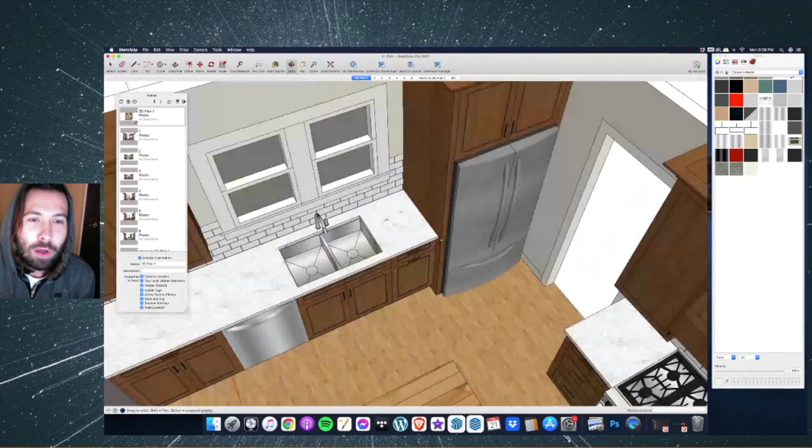I'll show you guys all my material selections and how I go about designing in Google SketchUp. What's cool is this is actually for a client of mine. I have to do two designs, and this is one of the designs here that's labeled. So what we're going to do is build the second design, and I'm going to show you step by step how I got to a point that it ends up looking like this. Then we'll even go in and I'll show you how I do all of the buttons. We'll have a lot of fun with it, and by the end of the video you guys should have learned a thing or two, and we'll show you how to do the kitchen model.

So let's get into it. I'm going to go back to the set here, and actually, why don't I just show you the model first? So this is a simple kitchen remodel here, this is the 3D plan. Again, I have all my buttons up here, I'm just going to go through them and show you guys what's going on.

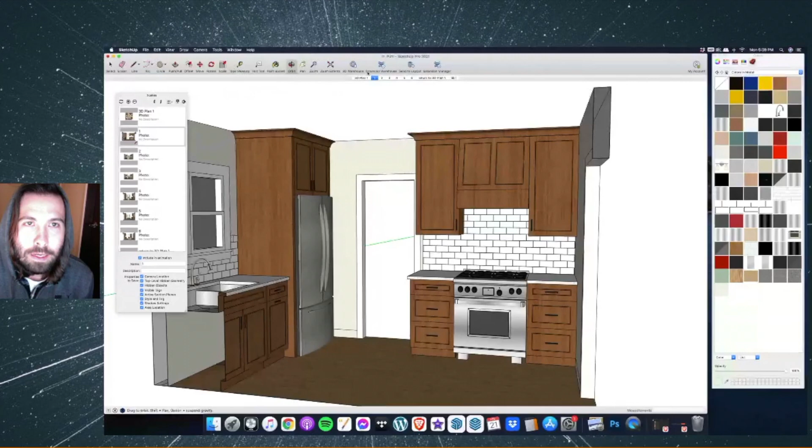We've got a range here with some subway tile, just some drawer banks side to side, a wood hood here with a simple crown molding. As we continue to bounce through here, let me go ahead and hide these section planes. This is the backside of this island here, and they asked for a green island, so that's not a design choice by me, that's just what they were asking for.

As we get into some of these buttons here, you'll look at the sink wall, and this has the dishwasher, it has the fridge, it has an upper cabinet, it has two nice windows above the sink, and a trash pull out here. Let's keep it moving over to, I guess, this is a side view, just kind of looking at the side of the island.

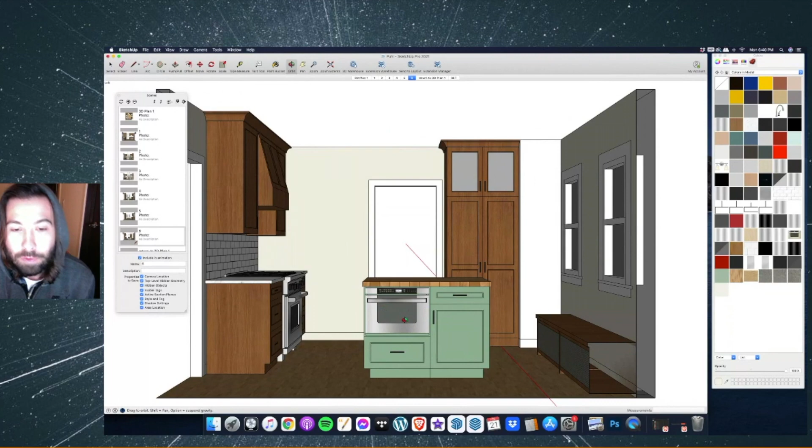You can also now see this is an existing radiator bench cover that I was able to kind of mimic and just update. Let's go ahead and move it to this last elevation. This is the island front, a really small island just because it's a really small kitchen, but that's where we're hiding the microwave, and you just got an extra couple drawers and a door there. So that is the simple layout here.

Now let's go ahead and get started on the second floor plan. This is what my designer drew for me, and I'm going to show you guys how I do this. If you guys watched my other video that I uploaded the other day, it showed you how to pull up your kitchen into 3D as far as like a massing model. I think what we're going to do here now is, again, I took all of my 2D boxes here that are essentially labeled, and now we're just going to go ahead and pull all that up.

So I'm just going to start and pull mine up to the ceiling here. Now that says drawers, I know that is a 36-inch tall base cabinet there. Let me go ahead and type in 3 feet, 3 feet. I don't know when that goes down. Over here we have a chimney with a hood above, so I don't know what that is, I think that's some kind of a big filler there. I'm going to go ahead and pull that up 3 feet, that's technically where the range goes. I'm just going to go ahead and pull that up for now.

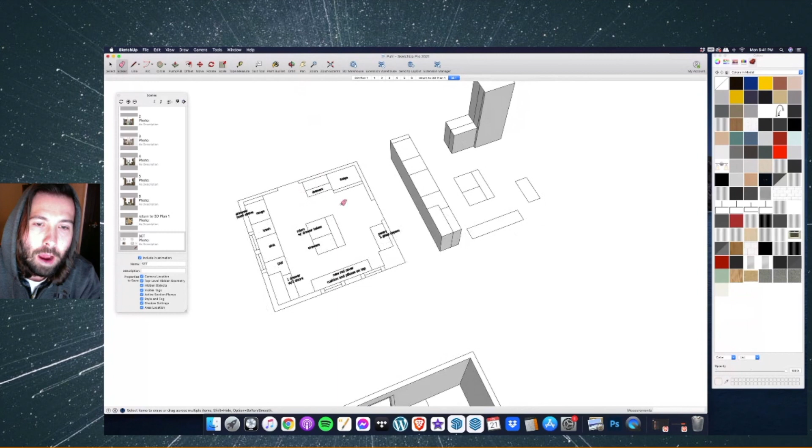We're going to put a trash here, we're going to put a sink base here, a dishwasher here, and one drawer with two doors there. I'm going to go ahead and just erase all these extra lines on the back there. Then over here we're looking at a pantry with two glass doors. Let's go ahead and pull that up all the way. Then we have another island here, so I'm just going to pull this up 3 feet, 3 feet, and 3 feet. This is a new radiator cover, cushion and pillows on top.

I guess I can show you guys how I put cushions and stuff on top of that. So I'm just going to pull that up about 18 inches or so. Again, I'm using simple dimensions here. Benches are usually 18 inches tall, base cabinets are 36 inches tall, and my ceiling height, which we measured, was 100 inches. So that's why I pulled up those.

So now we have our 3D model kind of massed. This would technically fit in here really nice, but I'm just going to leave it off to the side here. And let's get into the drawers and the fridge area.

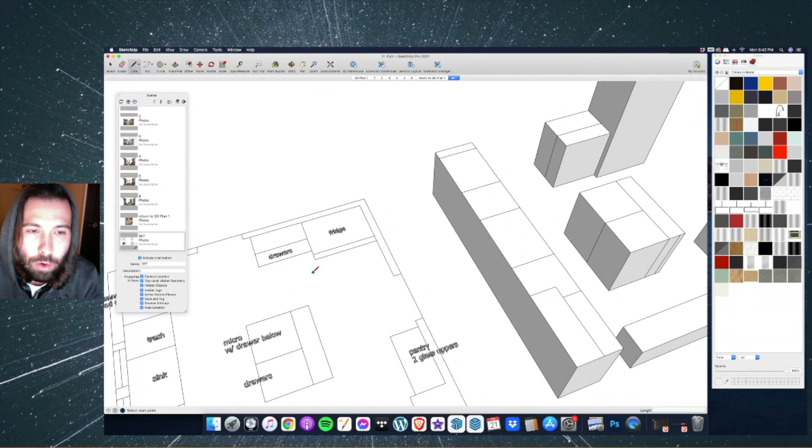Typically, just me and my designer here, she gave me 38 inches, and I just kind of know that we're going to put a fridge, a 36-inch fridge probably in this unit here. So I'm going to give it, I think we actually want to go 1.5 inches off this side. Usually there's a filler off the side of the fridge, and I'm actually surprised she drew it that way. Let me see.

Are we really close to the side there? I have about 4 inches. I might even cheat over a little bit. Let me take some out of here. 2'7.5". I'm actually going to steal another inch out of that side there. So we have about 1.5 inches on each side.

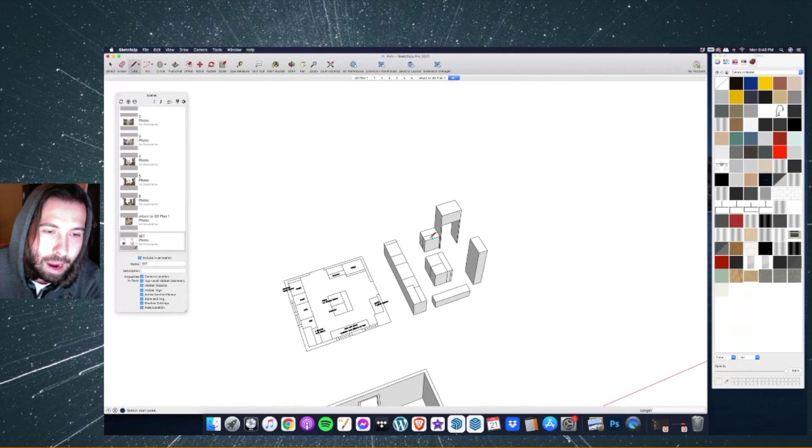And that's typically, you don't want to put a fridge in the corner because it needs more space to be able to turn and open here. So we only have about 30.5. So I'm actually going to steal another inch or so for that, and just give that panel there an extra inch. I'm using knowledge that I've acquired from working with cabinet makers, so I'm not sure if this is exactly how it's going to be drawn, but I do have a good idea that it'll end up being close.

So now we have our fridge location here. I'm going to draw down about 3 inches. That's where our crown molding will go. I'm going to pull these lines up here - these are the panels on the side of the fridge - and then we'll make 2 doors above. And now she wants a drawer base, and this looks like an upper cabinet here.

So I'm going to take this upper cabinet and pull that all the way up, 18 inches off the countertop will be our space there. Let's go ahead and back that in there. And there is our upper. Now let's go ahead and draw the countertop.

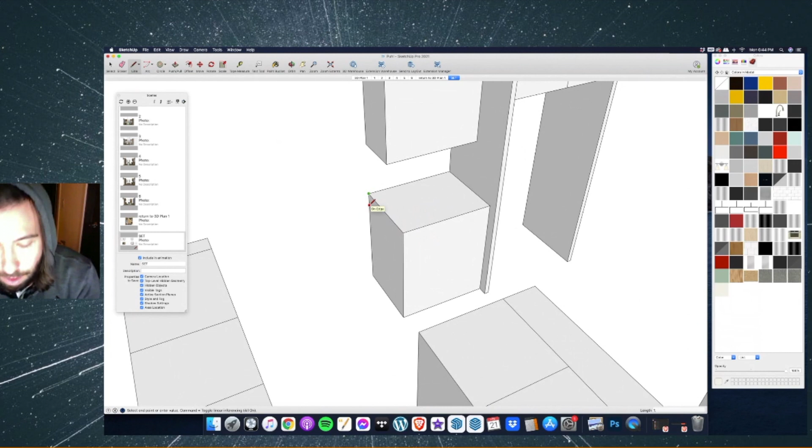That's about 1.25 inches. We'll just draw that corner around like that. And then from there, I'm going to pull the crown around. And then we'll draw 2 doors - we'll draw 2 nice tall doors there. And then let's look at this drawer base here.

I'm going to go 4 inches up for our toe kick, and it doesn't really matter. This is going to be a 3 drawer base. I'm just going to come down about 7 inches, and then I'm going to split it in the middle there. So we have 3 drawers - 2 equal drawers and 1 smaller drawer on top.

And then I'm going to get into drawing my doors. I'm going to just draw some simple full overlay doors. I try to draw them as simple as I can. If you work with cabinet makers, you know that these are drawn a little bit differently, but just for preliminary design and showing the client purposes, it's fine to show it just like this.

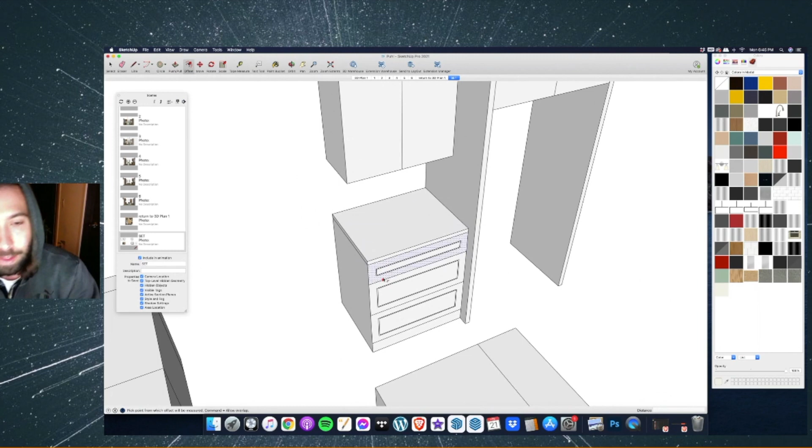So what I'm doing here is I'm making a door panel, essentially a drawer panel, and I make all of my doors and drawers look the same. I'm using 2.25 inches, and I use the offset tool here. I click in and you can start to see that it creates an offset rectangle. I can go outside of the shape or inside of the shape. I move it inside of the shape, then I type in 2.25 for my offset, and bang, that stays in there. So I'm going to continue to do that for the rest of the doors.

And then I put in this extra little detail here. This is just another edge where it kind of creates some definition.

I just do about 1/4 inch there, and that's that. So that's pretty much our cabinet right there. Now from this point, what we're going to do is just click into it all. Let's make it a group. I want to paint it the same color that I used over here.

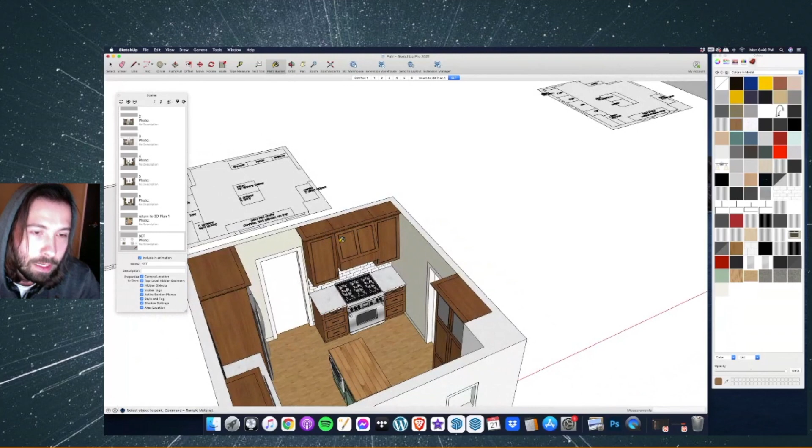This is the color cabinet that they asked to pick out. So I'm going to hit my paint bucket tool. I'm using a Mac right now, so I'm going to hold my command key.

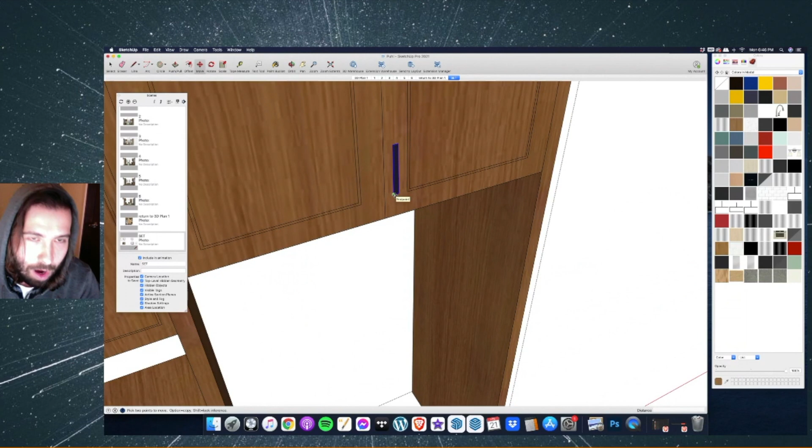I'm gonna eyedropper that and then come back over here and make that the same color here. The way I draw my door handles is I leave them 2D. If I go into rendering mode, I will extrude them. But for me, I just make about a 5 inch tall handle, a little more than a 1/2 inch wide. Then I just copy and paste my handles into my model here.

As we get to here, I'm just going to copy both of those and put these guys right there. So that's moving there. Then we got 3 drawers down here. Let me just copy one of these vertical handles, and then flip it sideways real quick. Okay, so I'm going to bring it down here.

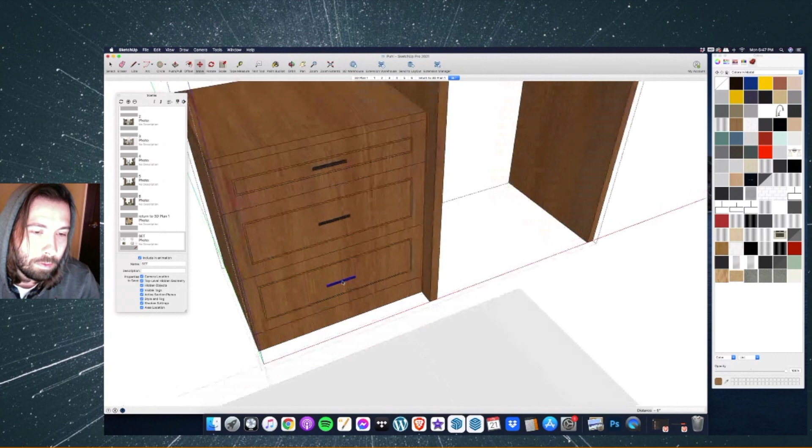Use the center points, kind of line it up. Let's get another one in here. Another center point, move that guy there. And one more. Let's just raise him up just a little bit. Okay, and there we go.

The fridge cabinet is beginning to take shape. I think now we will add that countertop on it. If you guys have your own kind of libraries, that's a good idea to have. But for me, I already loaded my quartz, kind of Carrara marble into here. So I'm just using my paint bucket tool to paint these.

I highly recommend if you go to Google or whatever and type in Carrara marble texture, you can come into Google here and literally just right click and save these textures and bring them into your models. I can show you guys how to do that if you need to, just let me know in the comments below. Or if you guys have any other questions, please let me know what kind of videos I can make for you to help you learn SketchUp.

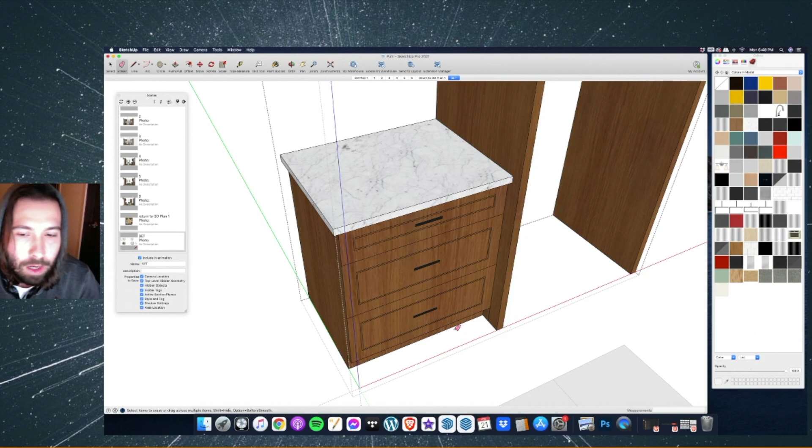So for me, I'm just going to pull, now I'm doing my final inch. Usually the countertop overhangs by about 1 inch from the cabinet. Then I'm just going to push at the base of my cabinet, my toe kick, in about 2 inches. Sometimes it's 3 inches, really depends on the cabinet maker. But that's pretty much my cabinet box.

And then we do have one more thing, we'll come at the end. I'll put crown all the way around that and show you guys how I do that. But for now, this is done. I'm going to go ahead and just drag this guy and drop him right into place. So that part of our model is good to go.

Let's go do this pantry, 2 glass uppers. So she wants a tall pantry, and I'm assuming she wants the 2 glass uppers. So it's going to somewhat look like this.

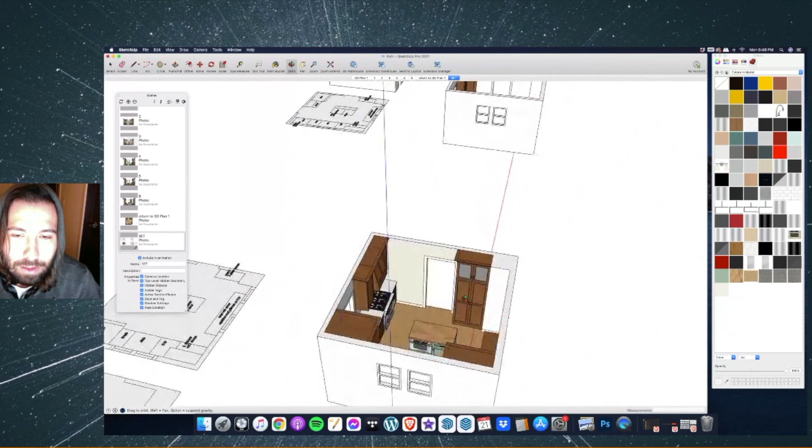Let me actually, this is really bugging me. I just want to make sure my walls are painted there. I don't know how I missed that before. Let me see, there we go.

Let's click into that. Okay, so we're going to be drawing this now. This is a tall 2-door pantry with the glass uppers that she asked for here. This is what we use as a starter. So let's go ahead and get into it.

So we're going to take, I always leave about 3 inches for crown molding at the top, so I just draw my 3 inches of crown. On a pantry, I come up the 4 inches that we would for a toe kick. And then basically I'm just going to make a big dividing line down the middle. Again, this room's about 8'4".

That's 100 inches. So for the top doors here, I came down just about 2 feet, which leaves us with just under a 6-foot pantry door. That's kind of how I divide up my doors.

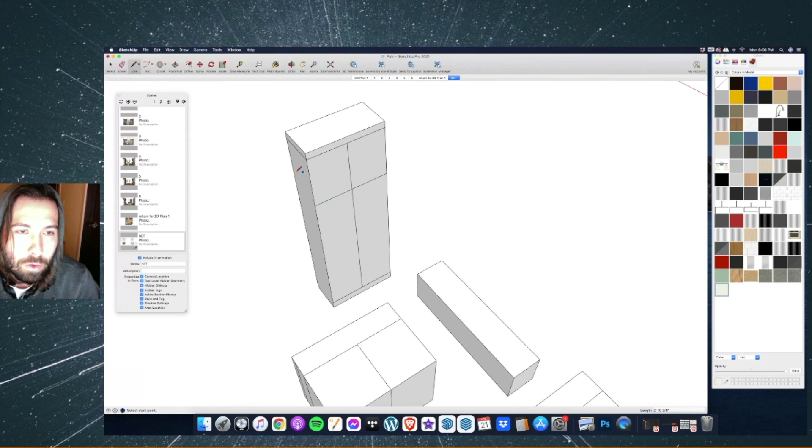And then again, if you remember the 2.25 offset, I clicked on the offset tool, clicked into my shape, and I'm just moving my mouse inside, and you can move it outside too, but we want to go inside. I'm just going to type in 2.25 - that's my 2 1/4.

And I'm going to continue to do that here. Now, just because I've worked with cabinet makers, I know that typically any door taller than like 48 to 50 some inches, cabinet makers usually want to split the door and put a divide into it, just because that's sometimes how doors warp. If they're too tall and they don't have a strong middle section, they tend to warp. So I'm going to go ahead and put that extra divide in there, and then copy my door into there.

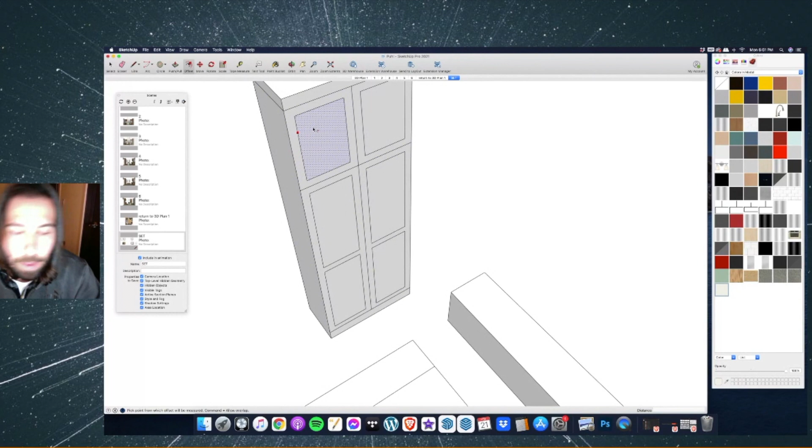So there we go. And then I'm going to come back in again with that 1/4 of an inch. I'm hitting offset 0.25 and going inside of my shape here. And you can actually, once you set a shape, if I know I'm going to be doing this - I had to do 1, 2, 3, 4, 5, 6 - I had to do 6 of these offsets. You can just click into one once it knows what you want to do. So if I wanted to change this to 1, that just did a 1-inch offset there. Now everything I click will just continue to be a 1. So it kind of works nice like that.

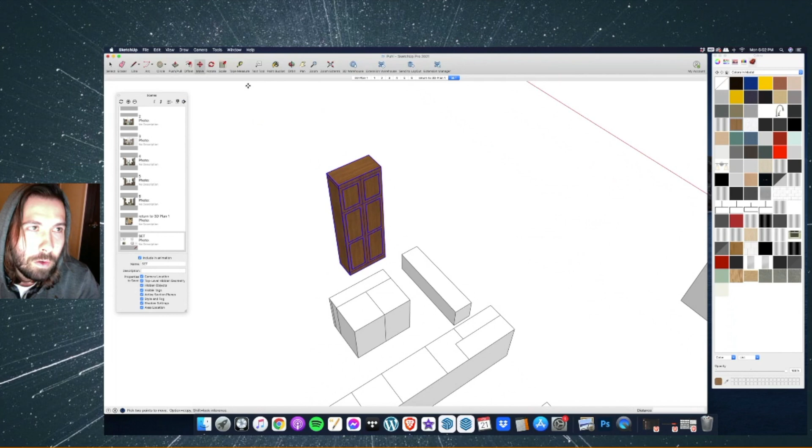So what I'm going to do now is go ahead and make all this a group. Let's go ahead and paint that cabinet our wood stain color here. Let's go ahead and drop it into our model too, and locate it in here. And then what else do we need?

We need some black handles, some door handles on this guy. So let's go ahead and click into our fridge model. I'm just going to copy those 2 guys, and okay, let's put it into here. So sometimes this does it - SketchUp is usually good at recognizing what kind of plane you're on, but sometimes you just need to flip things and make sure they go in there. So that's what we're doing here. Let's go ahead and put the handles there, and then we get another set. Put that right there. So that's it.

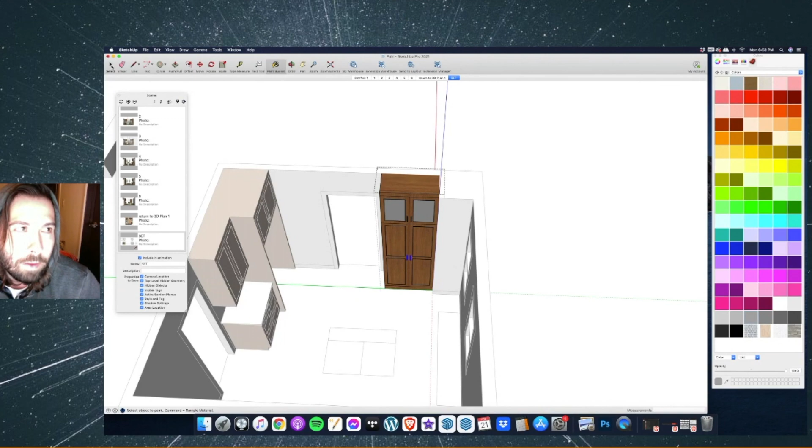And then because we did say that she wanted glass up there, I'm going to go ahead and go over to one of my colors in my model. I usually - you can select a glass, there's actually like a glass, you could do glass and mirrors, but for me, I like to kind of just use a gray tone. And that works as well. So there we go - that is our 2-door glass pantry.

We're getting almost halfway there now. I think let's go ahead and build this new island here - microwave with drawer below and then drawers. And this one's got a nice little overhang in here. If you guys remember this one before, it did not. That's going to be a little bit tighter all the way around it, but I'm glad to see that we have an actual island where we can sit at. So we'll be able to throw some benches in there.

So I'm going to go ahead and take my island here. I clicked into everything and made it a group right away. And now let's have some fun with this. I'm going to go ahead and, because I just wanted to show you too.

She asked for it to be sage green painted with a butcher block top. So that's what we're going to give this client. Let's go ahead and erase these silly lines at the top. And then I'm going to come down. For a butcher block top, that's usually a little bit thicker than a countertop, so I'm going to give it 2 inches. And then I'll erase these lines here.

And then this is my overhang line. She gave it about 10 inches of overhang. So I'm going to take my push pull tool and I'm just going to push that wall that way, and that is our overhang. Let's go ahead and clean up some of these lines.

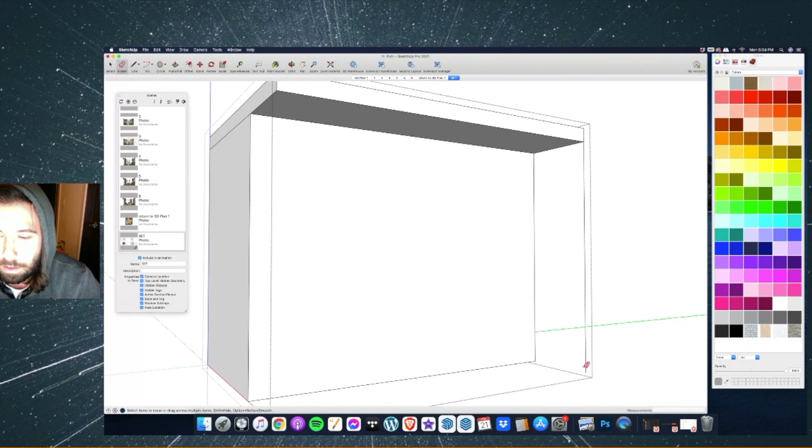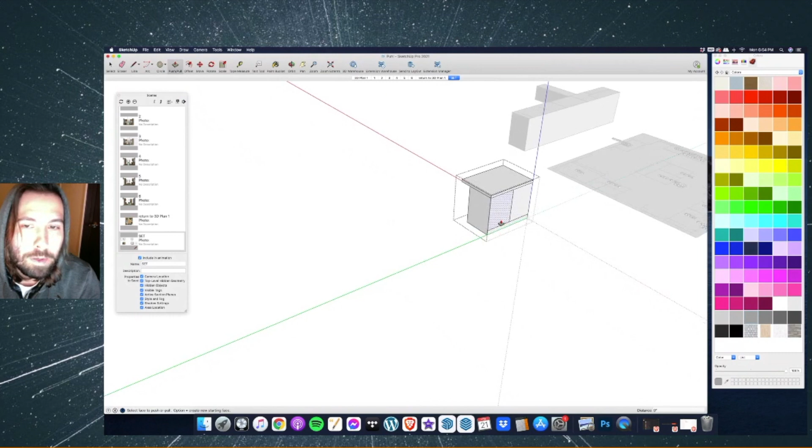I'm just going to continue to draw the overhang here. And since we're drawing a base cabinet, I'll go ahead and put my 4-inch toe kick. Erase that line. For now, I'm just going to push that in 2 to 3 inches, depending on your cabinet maker. And there we go.

So we know she asked for a microwave with a drawer below, and on the right side here it's going to be just drawers. I like to come down about 7 inches on my drawers, flip that over, and then divide these in half.

Just for design purposes, I like to drag this extra line over because she said she wanted a drawer below. Let's use our 2¼ inch offset to get all these a nice front panel on the drawers, then offset another 1/4 inch there. And here we go.

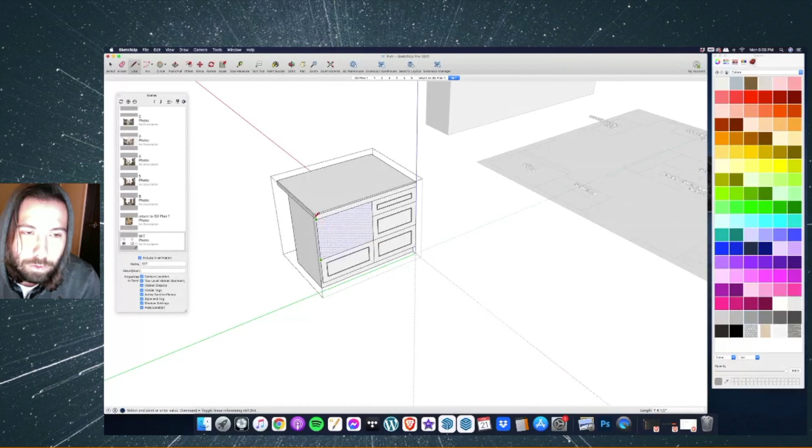This is our microwave spot. She gave us 2 feet to get a microwave in there. So again, this is based on the cabinet maker, not me. I'm just doing an inset edge for about 1/2 inch.

Typically you'd go to the 3D warehouse and download a microwave, but I have a folder of stuff I've already saved, so I'm just going to insert a microwave here. I think I have a microwave drawer, maybe. Is that... no, that's an actual microwave. Let me get my microwave drawer. There's my MW drawer.

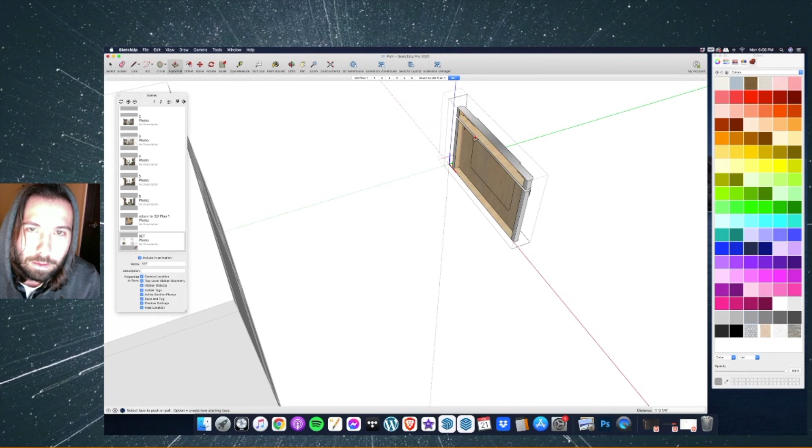I should probably clean this guy up because I typically do this every time I bring it in, but I just want to make it cleaner for the sake of the model. I just wanted the front of this guy. So now we have a microwave here, and I'll grab a corner and put it right on that corner.

You see how it kind of overlaps my current drawers. Let's use the tools scale. I'm going to grab the middle node and select that, then grab this bottom node and select that. We should be good to go—we now have a microwave drawer into our microwave.

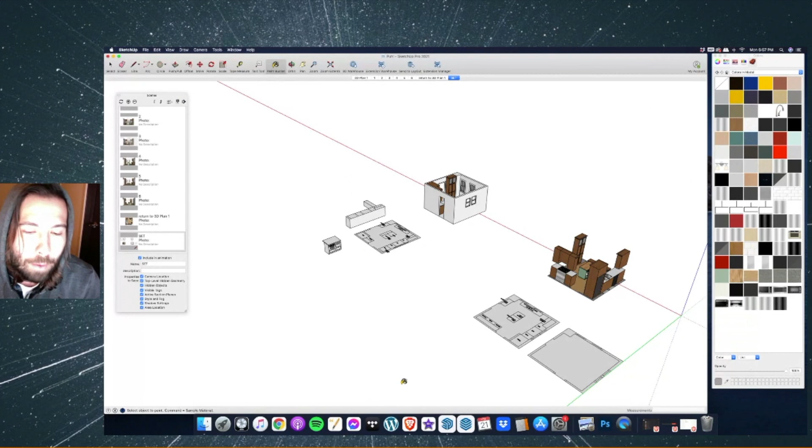Now we can have some fun and get some painted colors. If you guys remember, my client asked for a green island, so I went to Google and typed in sage green paint. They asked for a sage green island, so I pulled a random sage green here. That's what you're seeing, and I downloaded it into my model.

I'm just going to copy what I have over here and paint that guy there. I did the same thing with a butcher block top—I found a nice butcher block texture in my library that I like. I'll just copy the other one from the island for the speed of the video, and paint all my wood textures in here. That's pretty much done.

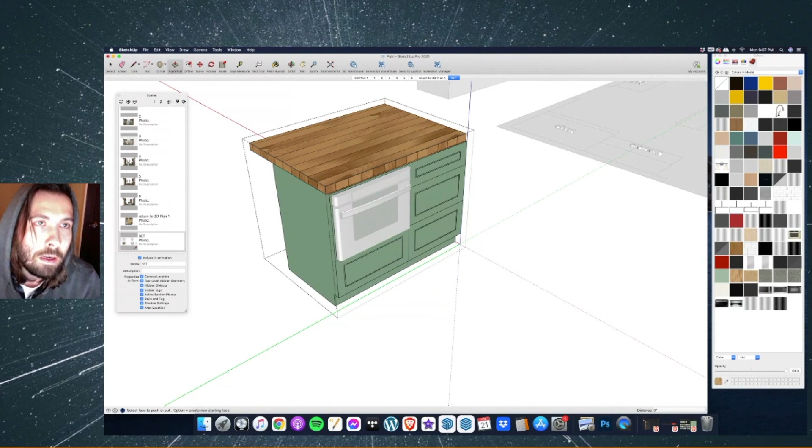I want to give everything a small, about 1/2 inch overhang on the island here. That actually went the opposite way—not sure why. Let me pull that out a 1/2 inch. Pull that out a 1/2 inch.

And then, basically we just need some door handles. Cool, well, I'm going to go ahead and move this guy into our model.

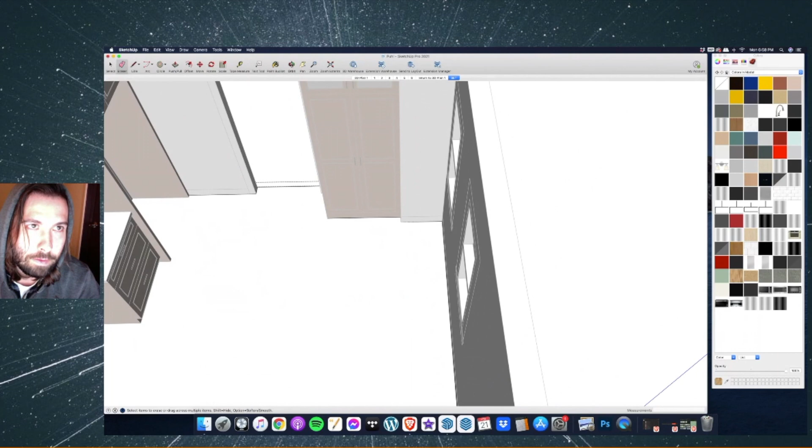Let's put it there. I'm going to erase everything on the floor here. Let's get rid of that scenes tab—just erasing everything on the floor since we know what's going on now.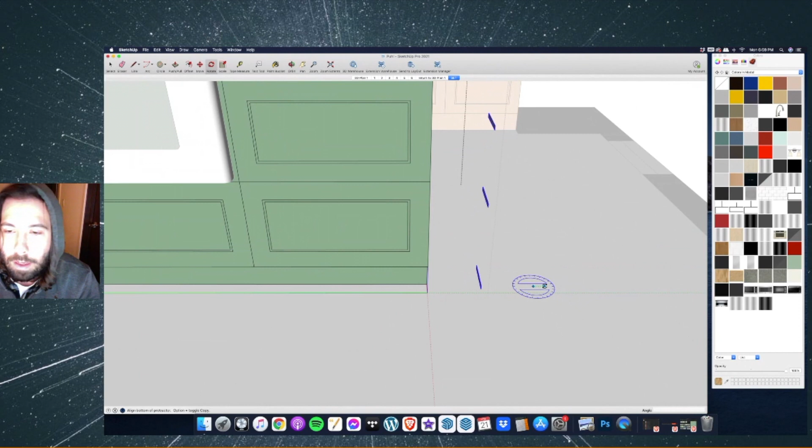I leave my drawer handles 2D because, I mean, I guess I could do the extra effort to extrude them, but for some reason I just like to leave them 2D in this early stage of the process. But there are our door handles. Let me go ahead and paint these black, and then I'll do one more black door handle down here.

Very cool, okay, good to go. So island, pantry, fridge, all done. Let's go ahead and finish.

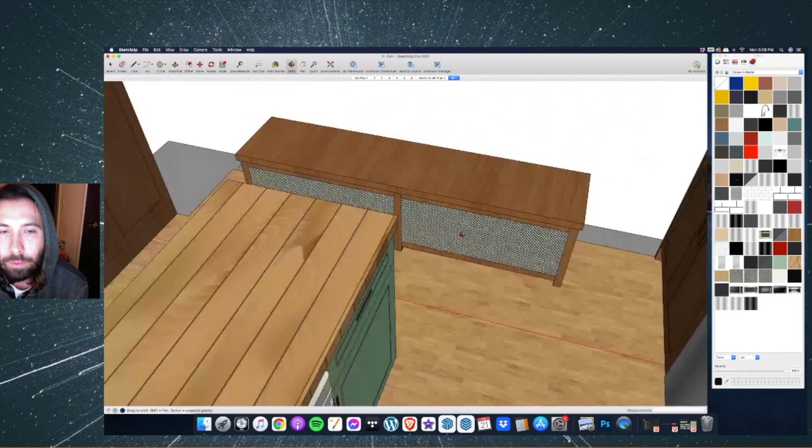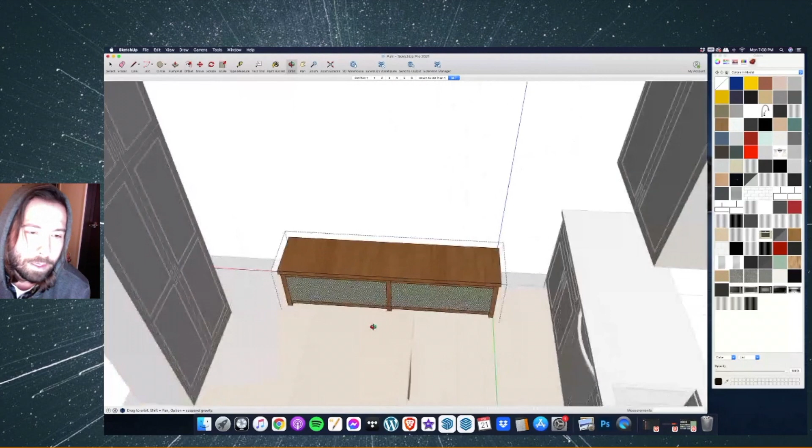Let's knock out this. She's asking for a new radiator cover, cushion, and pillows on top. I already drew a radiator cover here. If you guys wanted me to show you how to draw something like this, I totally can do that. It's not something that's typically in most kitchens - in this instance it's kind of a rarity. I'm just cleaning up these lines here. I drew a radiator cover and threw some mesh on the front of it to allow the heat to come through.

I think what I'm going to do now is just copy this and make this one quick. I'm going to copy it and drag it over to my other model here. And let's go ahead and go to the 3D Warehouse.

Let's look for a seat cushion. I'm just typing in the word cushion. These are all kind of pillow looking things. I'm going to click on models. That blue one's not that bad. Let me add the word bench cushion. So there's like a longer one. Here we go, that one's not bad.

I'm going to go ahead and download this one. I think I'm in 2021, I can't remember. I'm going to call this bench cushion and download that to the desktop. From here I'm going to go into SketchUp, import, go to my desktop, and select that bench cushion we just put into here.

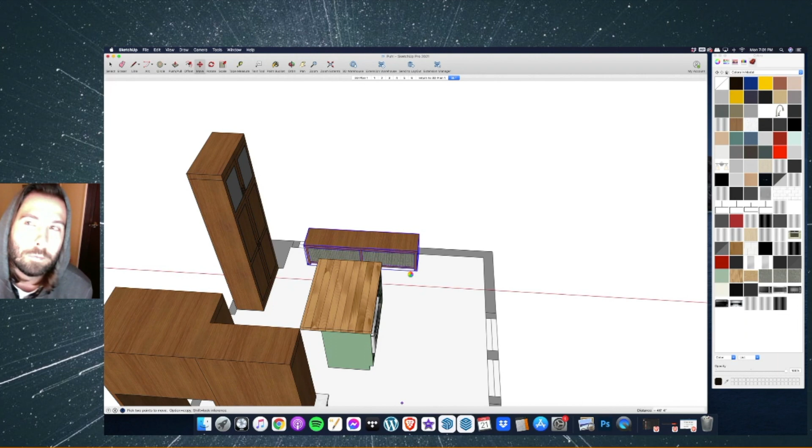Let it load. All right, there's our bench cushion. I'm going to go ahead and get it up on top of our bench. Cool, and now we kind of have - well, maybe I'll make it into two, we'll make two cushions here. So I'm just going to scale this thing to fit my bench.

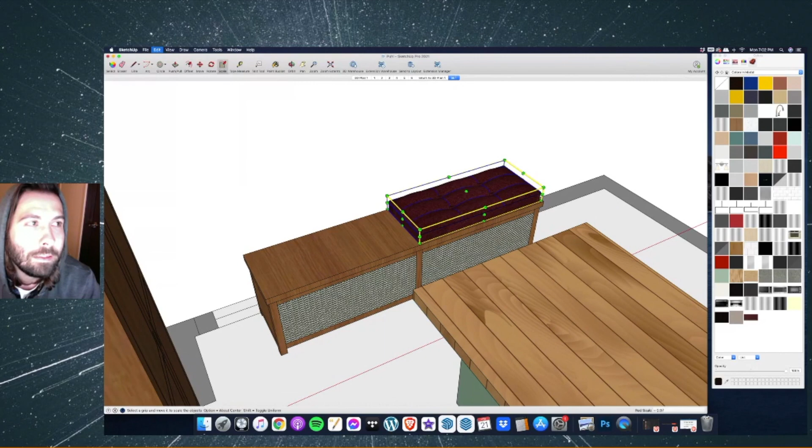I can edit the color later, I'm not too concerned about that right now. Like I don't want a maroon one, but I'm going to go ahead and get my sizing done here. I'm going to go to that midpoint, and then let's go ahead and copy and paste a second bench cover. Let's get him into here, and I'm looking for that point right there. We'll pop him right there, and we'll bump him back, looks like half an inch.

Cool, so that's how you guys import stuff from the 3D warehouse. I like to just go to Google, the internet one, and look for it. But there we go. And then if you guys wanted to edit the color, I'm going to go ahead and just highlight that - and where is my bench cover?

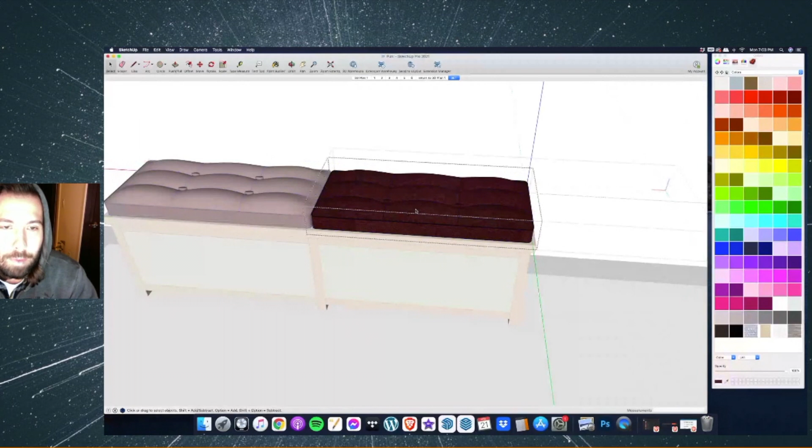Why am I not seeing it here in my... let me go to my home, colors in model. So I'm not seeing it there. What I'm going to do here is come into here. Why can't I see - I'm not really sure why I can't find my SketchUp material here.

But if I wanted to change this color, I totally can. If I wanted to select like a yellow, we could do something kind of crazy and just start to do some fun things that way. But I'm not going to do yellow. Let's go ahead and back out, and I'm just going to leave it maroon for now.

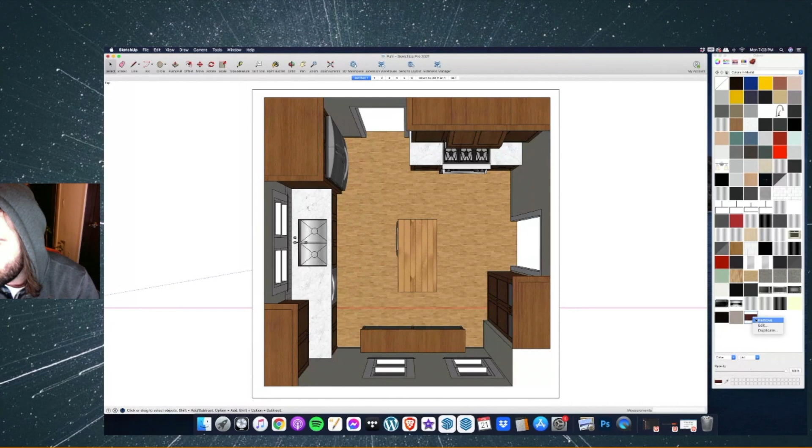Actually, it looks like my maroon is right here. Let me go ahead and hit edit. I'm going to try and change the color of this guy - very well, so I'm able to change the color now. If I want it lighter or darker, I kind of liked a nice dark. Maybe the blue's kind of cool - let's just leave it like that for now and see how it looks later. But there we go, that is our bench cover. Let's keep it moving here and get that final wall cabinet figured out.

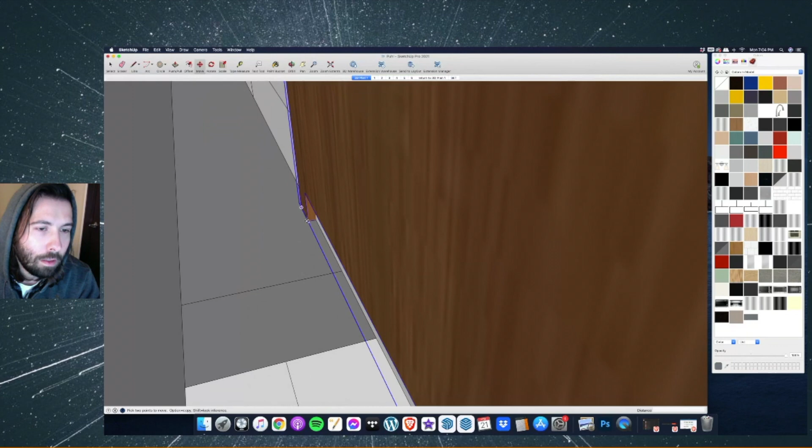Curious why that guy is stuck. Why is he stuck? Half inch that way. There we go. Okay, so let's continue here.

I'm now going to finish the sink wall here, which has our range on it. So range in the corner, chimney hood above, trash, a sink, a dishwasher, one drawer, two drawers.

What I'm going to start with is drawing my countertop in here all the way. I'm going to remove the range void here, so that's where our 36-inch range is going to go. Let's go ahead and knock out our dishwasher space as well. The 24-inch dishwasher space goes there.

Eliminate some of these lines. I'm going to go ahead and pull my upper up all the way to the ceiling as well. Let's go ahead and get that 18 inches off the countertop.

Bang, boom. Just erase these lines. Okay, and then I guess let's knock out that upper real quick.

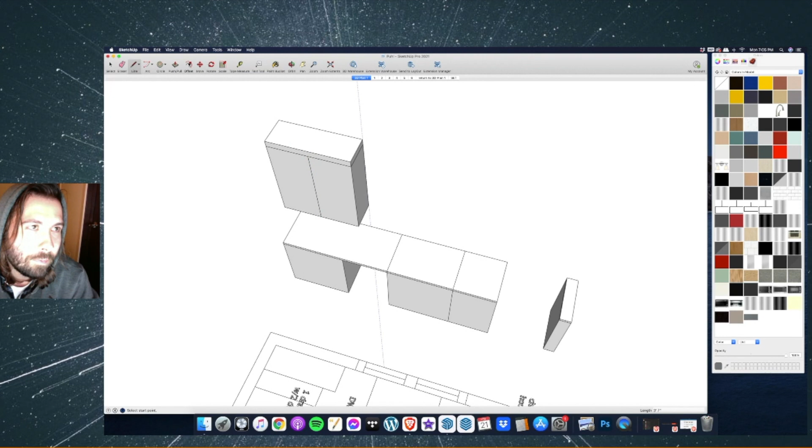Again, we do 3 inches off the ceiling for our crown molding space. I'm just going to divide this upper into 2 doors. And again, 2.25 inches offset, and then I'm going to offset another 0.25. And then what do we got here? We have 1 drawer with 2 doors.

Let's go ahead and get our 4-inch toe kick put on all of our remaining cabinets. Oh, keep snapping. So 1 drawer and 2 doors.

I'm going to drop down 7 inches for my drawer at the top, divide that into 2 doors. For a sink, I do the same thing, and kind of make it look like a false drawer front. And then we have a trash here. I'm going to put a drawer above the trash.

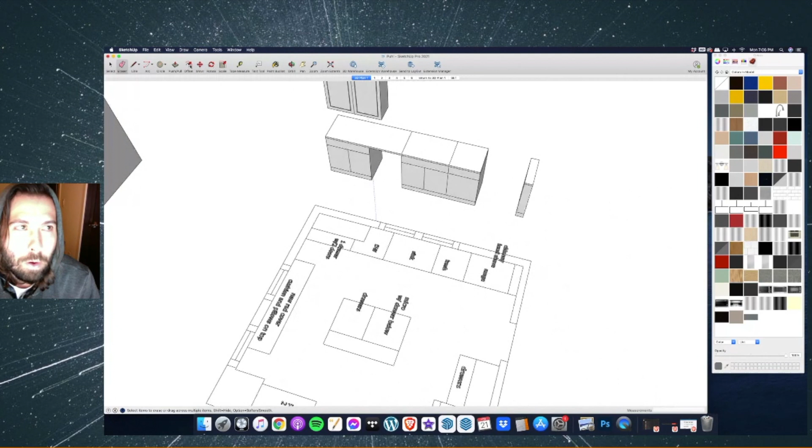And then I think we're just going to panel out that guy next to the range. I'm not sure what she was thinking of putting there, but I'm going to leave a small panel on that one. So let's go ahead and start to offset our cabinetry.

Again, I'm using 2 1/4 to offset my panels of everything here. And I'm going to drawer there. I don't know if I'm going to be able to get 2 1/4 there though, but we will leave it. I suppose that doesn't look terrible. I'll see what she says there. But anyways, I'm going to continue doing my 1/4 inch now, just 0.25 offset inside of these panels to give it a little bit more detail and definition.

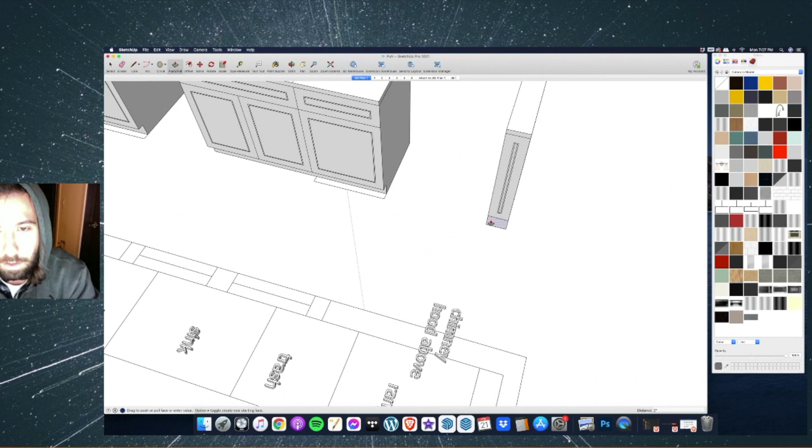And then that's it, we're getting there. We're almost done. I'm going to knock in the 2 inches of toe kick. Sometimes it goes the opposite way. 2 inches, and let's go ahead and go 2 inches in. Use my eraser tool just to clean up some of these lame edges.

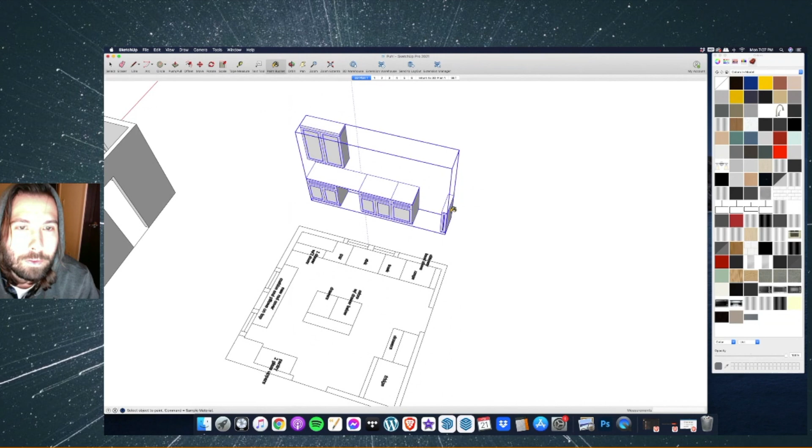And now let's get a sink put into this sucker, huh? Well, first I think what I want to do is make everything a group together. Let's go ahead and make that a group. I want to paint my cabinets real quick. I'm just going to select that wood color. Let's go ahead and get that done.

And then let's go ahead and get one of the countertops, get that countertop texture back in there. So we got countertop, countertop, countertop. That's our overhang. Just painting, painting, painting.

And then we're going to draw a sink here. So she gave me a 34-inch sink base. I'm just going to kind of offset things by about 2.5 inches or so. Erase these lines here. Looks like we need to repaint our countertop.

I'm going to go ahead and sink that in an inch and an inch and a quarter. And then typically there's like at least 4 inches back here, so I'm just going to extend that to make room for the faucet.

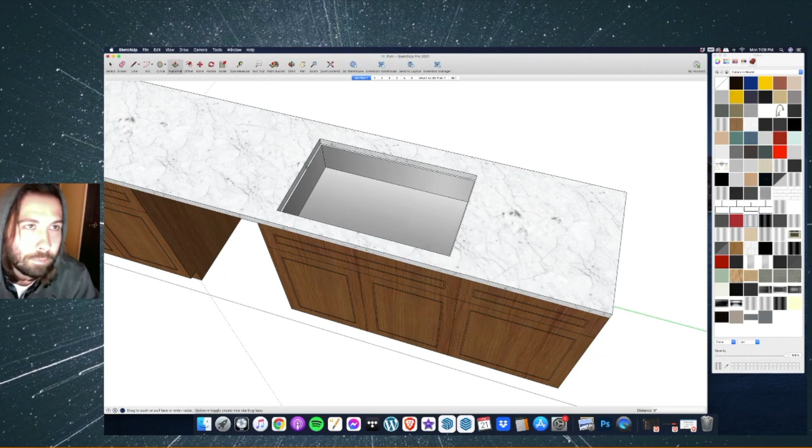And then from here, what I like to do is I kind of just like to make a small inset of about 0.25, and I'm going to go ahead and paint the inside of the sink with a metal material here. Then I'm going to go ahead and just push my metal sink down about 6 inches. I can go ahead and paint the top of that metal sink there too.

It depends if it's a double or a single sink. I'm going to make this a double sink. I'm just going to come up a little bit here and just create the partition for that sink.

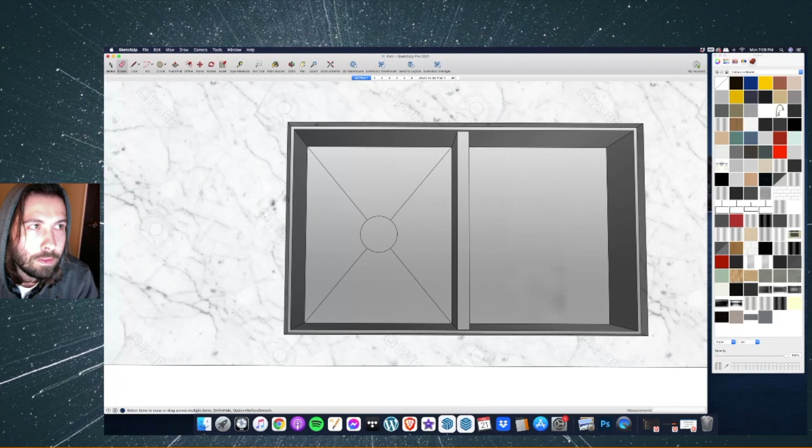Let me get into here. Let's just push and pull that there. Okay, and then sometimes you can see it's on the sink. I'm gonna go ahead and draw my X inside the sink, and then I like to show the drain location. So let's make this about that big. Go ahead and get rid of those two lines.

I keep my sinks pretty simple. You can use the 3D warehouse to go and get sinks like that, but for me, I just draw sinks really quickly this way. So that's kind of how I like to do it.

I'm gonna go ahead and hit my import button. I'll show you guys my SketchUp library. Why isn't it opening? Let's go ahead and click into kitchen. I have a faucet here that I just like to use, it's kind of my go-to. It's a preliminary faucet that looks well with most kitchens. If someone wants something a little bit different, I can get into that with the 3D warehouse, but for now I'm just gonna go ahead and put my sink faucet there.

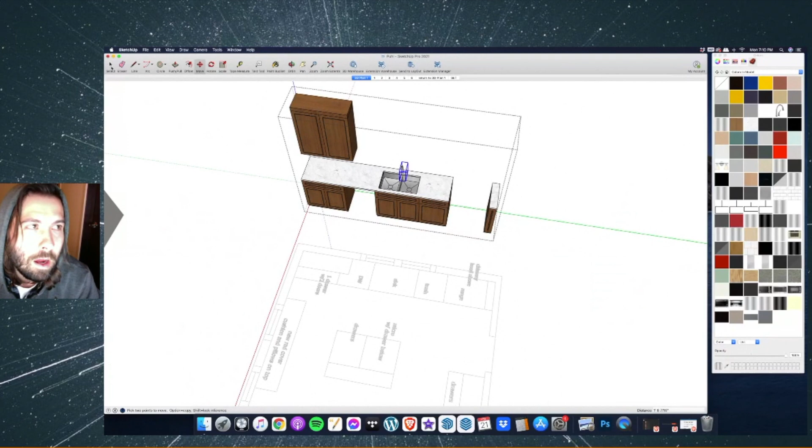And now let's go ahead and pop in, I have a dishwasher ready to go. I'm gonna go ahead and get my DW. Where is my DW? There is my DW. I'm gonna go ahead and just stack that guy right there.

We have to get a range. I'm gonna go ahead and import, I think I did this 36-inch Wolf. Google 3D Warehouse, or SketchUp Warehouse, has a lot of models on there if you're looking for a Wolf or Sub-Zero fridge, things like that. They have a ton of brands - Thermador, Wolf, I can't think of all the brands right now, but they have a ton - GE, LG, tons of different options for you guys there.

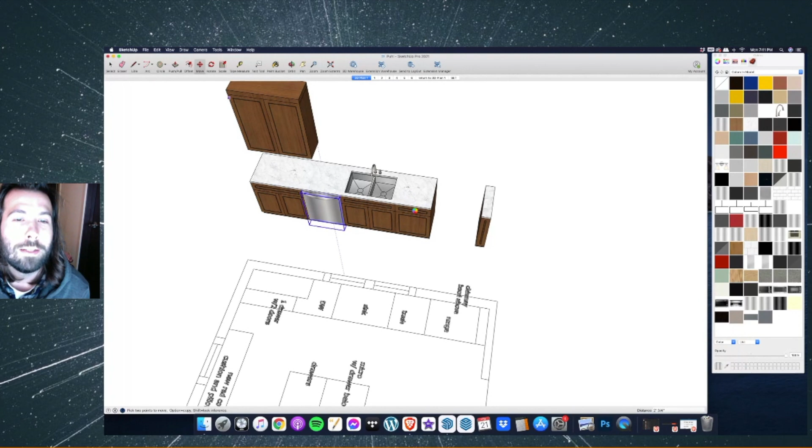So it looks like my model is thinking. Let me see what's going on here. Apparently it doesn't like the Wolf range. So we'll see if we can get that back.

I did say we're going to need maybe one more thing here. I want to go and get a bar stool real quick, so we're going to put some bar stools at that island. Probably something that's not very busy. I'm just going to take this cool metal one because it doesn't have a back. It's a tight kitchen, so you're probably going to want something a little bit less bulky, I would say.

All right, so there's our range. So let's go ahead, move that guy down. And what else do we need? We probably need some cabinet handles, huh? Let's go ahead and get some cabinet handles, and I'm just going to copy and paste what I already made.

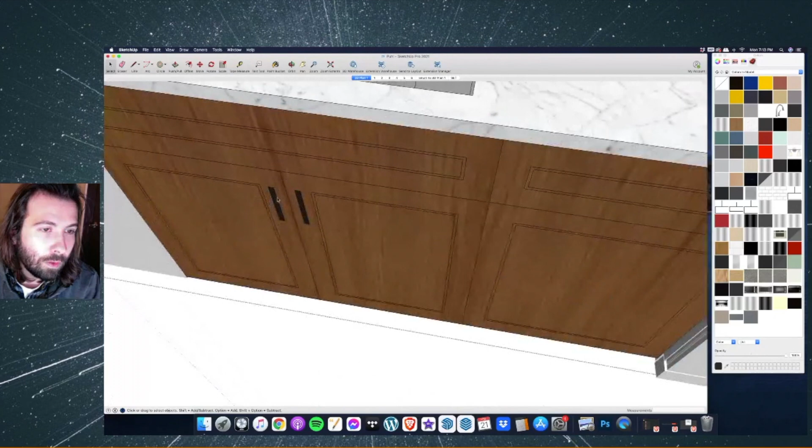So there we go, that's our bank of cabinets here. We do need a range hood yet. I'm just gonna go ahead and copy all this and snag this guy and snap him into our model. It does say here she wants a chimney hood above. So if we wanted to, we can go into SketchUp and type in chimney hood and see what's good, so I can download any of these that I wish. Let's go ahead and download this simple chimney hood at 36 inches.

Just for the sake of time, I typically draw all my range hoods because I like to quickly draw everything, I guess is what I'm trying to say.

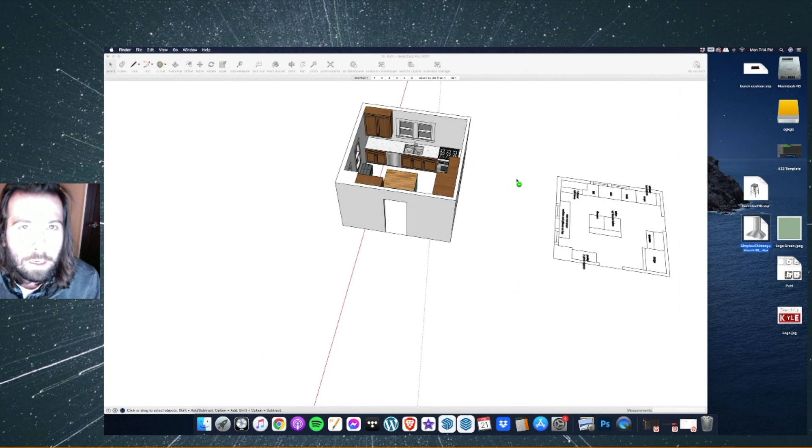So I'm inserting the range hood into my model. Let's go ahead and get him in there, I'm going to flip him in. And how do we know we're on center here? Let me go ahead and get my center point for this range hood.

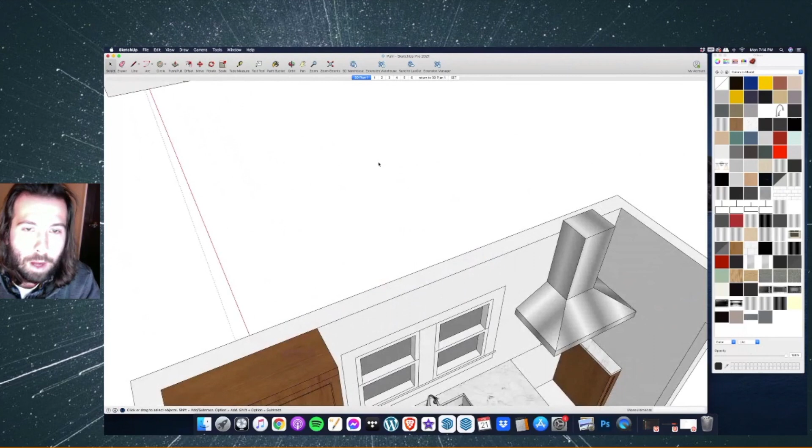And I want my range hood to be 30 inches off the countertop, so the bottom of it is at 30. I'm going to go ahead and take my model now and just kind of slam it in there. I'll chop off the top of this guy, let's get that there, and that is our range hood.

Now, is this a 30-inch opening? My bad, so I did get a 30-inch cooktop or range top in here. So what I'm going to do now is shrink the range hood to mimic the 30 inches. Let's go ahead and tool it up and scale it that way.

So there we go, we are now almost done to a full model. What I'm going to do is get a sky view of everything here. I believe I got everything off this thing, so I'm going to delete this from my model here. I got all the 2D stuff down there, I'll come back to that.

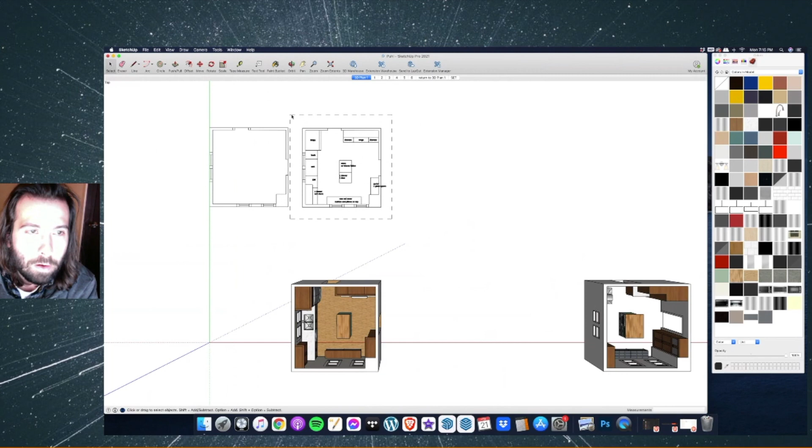I wouldn't mind getting a floor texture on here. I did go ahead and find mine already. I have a wood texture that I'd like to use on a lot of my floors, but I need it to be running the other way, actually. So what I'm going to do here is try and flip it and see if that works.

It's weird because Mac versus PC, the programs are very similar but they do things differently, and this one's kind of quirky, but there we go. I'm able to get that floor running in the other direction. I'm going to go ahead and quickly do that in my other model too. And now we can do the fun stuff.

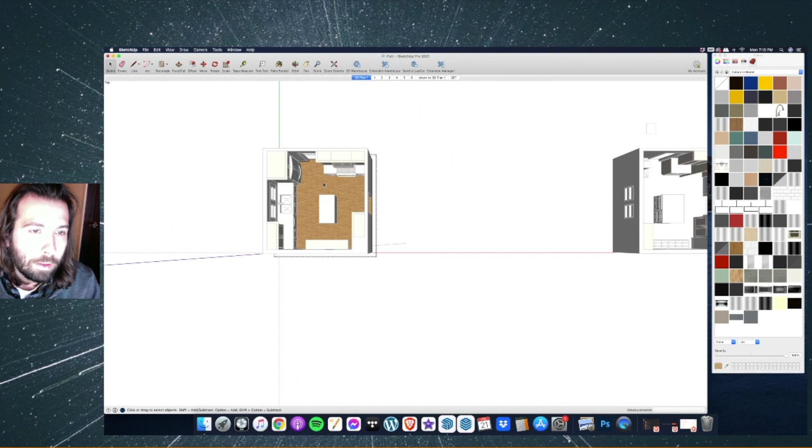I want to show you guys how to set up some scenes, and how to use the follow me tool. First, now that we have this all in there, let's actually get a fridge put into there as well, and then all of our appliances will be taken care of. Then we're going to start getting into some scenes.

That's like when we have a client come and look at the model, basically just the buttons you see at the top of the screen here that allow us to show off the model. So I'm going to hit top view, hide the rest of the stuff here, hit zoom extents, and there we go. Let's click on our window tool scenes.

I'm going to hit new scene and call this 3D plan 1. And I'm going to duplicate that right away and say return to 3D plan 1.

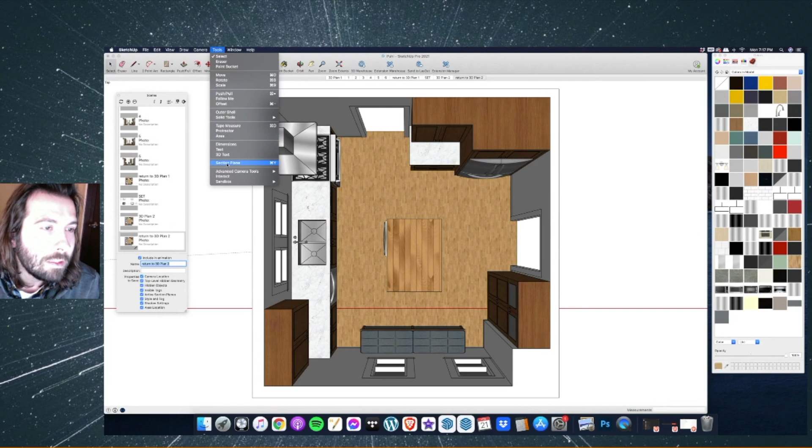From here, let's go to Tools, Section Plane. I'm going to pop another section into this wall, highlight that one, and move it to where I want it. Right about there looks good. Let's hit the front view, hide the section planes, and hit zoom extents.

And there we go, now we're looking at a front view here of our fridge. Just for the view, I'm going to hide the island because it makes it look a little nicer. And then let's hide that microwave too, don't need a floating microwave there.

I'm going to hit new scene and we'll call this number 7, if I'm keeping in with the numerical order of things. Let's set up the next scene. I'm going to hit Tools, Section Plane, and I want to cut through that wall.

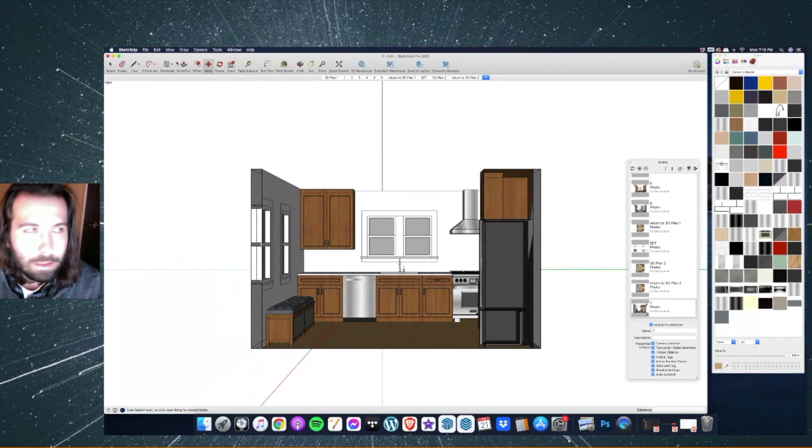Go ahead and highlight that one, and we'll just push this in a little bit. Something right there looks good. Let me hit the right button and hit section planes hidden. Now I want to get my island back in there, so I'm going to hit unhide all, and my island pops back in there.

I'm going to hide that in the background there, so my island's back in there now. Let's actually go ahead and hide that fridge, it's a little annoying to see the fridge there. Actually, can we slice this a little bit? You know what, let's go ahead and leave it like that.

Now that we are looking at this view, let's go ahead and import, because we had bar stools that we wanted at the back of the island. And now that I'm looking at it, let's put those stools in there. So there's my bar stool.

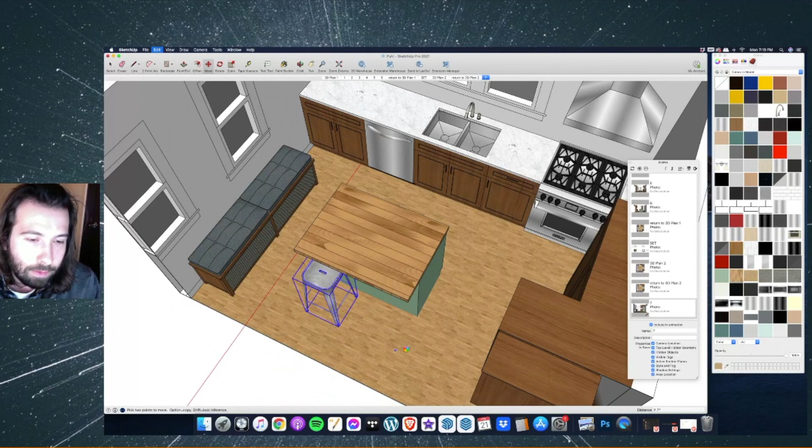So I'm getting some bar stools in here. Looks like we can sit 2 people comfortably at the island. I just kind of went with this cool metallic industrial look.

Let me go ahead and hit camera again, standard view, and we'll zoom extent. Just for the sake of everything, I'm going to group the chairs together. Let's go ahead and hit a new scene, and we'll call this number 8.

Now I like to hide the island in this next scene. Let's go ahead and hide the island, hit another scene here, and show scene number 9. I'm actually going to hide that as well. That just gives them a full look at this wall.

Now that we're here, let's go ahead and get some tile on the wall. I'm just going to use my rectangle tool. We'll kind of start here, actually. I'm going to go there. I want to go up, and I'm kind of just sketching in where I want the tile to go.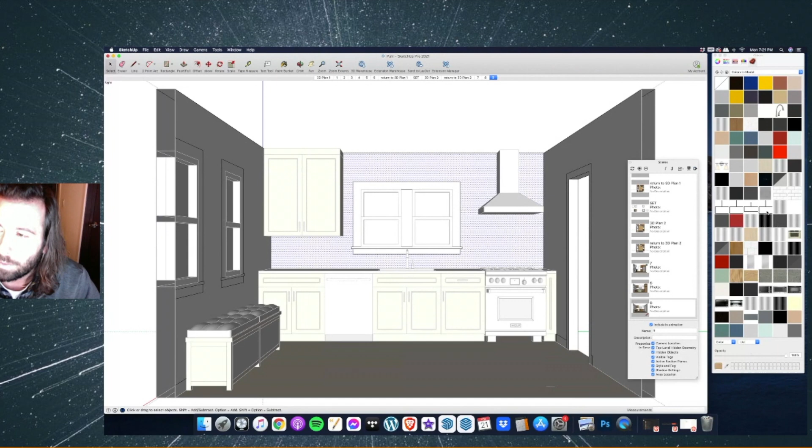So now I have this whole area selected. There is some cool tile - if you just go to patterns, you can import all kinds of patterns. I actually have one that I was using earlier, so I'm just going to default to that one. I think it's this one right here. Let me go ahead and paint that in there - that's my subway tile. So we got subway all the way to the ceiling. That looks very good like that.

We'll come back to the crown, but that's looking really, really good there. I like that elevation quite a bit. Let me go ahead and return to 3D plan, and we're going to go back to our tools. Let's hit section plane, and now we're going to be looking at the island. Just kind of move that there.

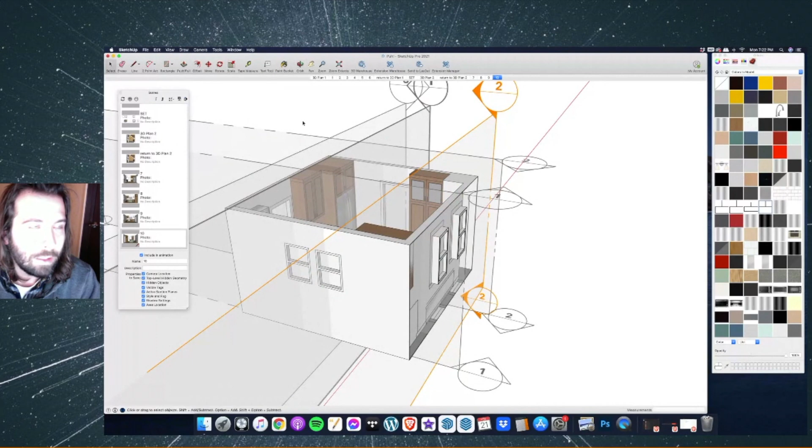So I'm just creating a scene here, and again, I like to keep that one in there, but let's keep it moving. We have one more scene that I want to set up, so that's a section looking the other way here. And we'll kind of chop it right there.

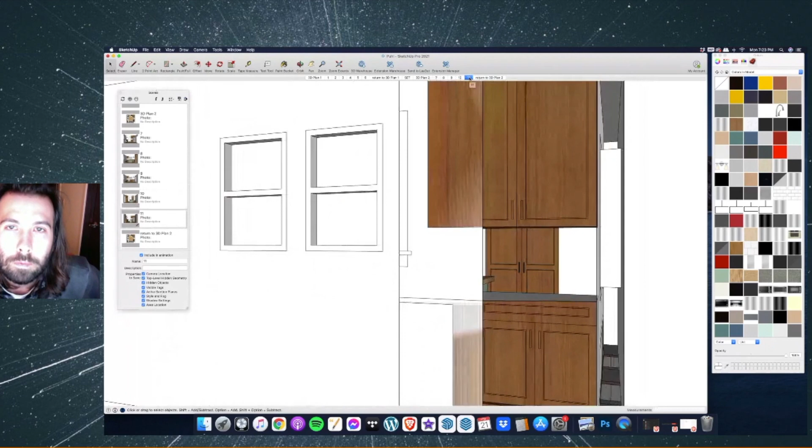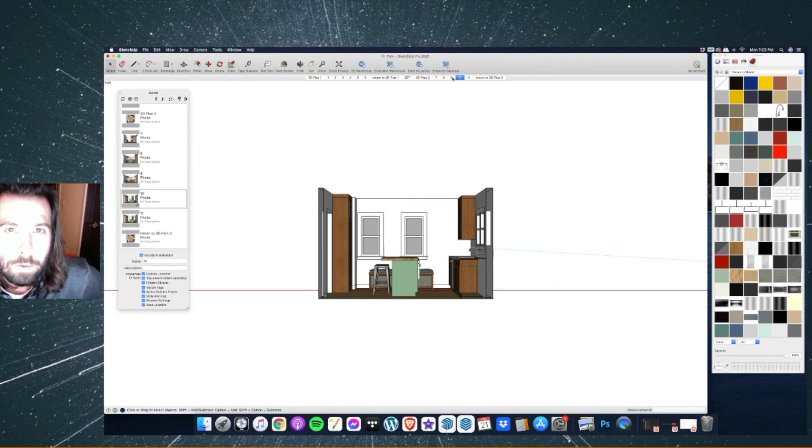So we kind of just missed a view looking this way at the new bench and island. So let's just get another slice in here. Let me hit back. So 1, 2, 3, 4 - I believe it's scene number 10. There we go, so number 10.

We'll make that one number 11 so you can see the beautiful bench there. And then we'll finish up with, how do I see my section planes? We'll finish up with that one. And then from there, I believe we have all of our scenes done.

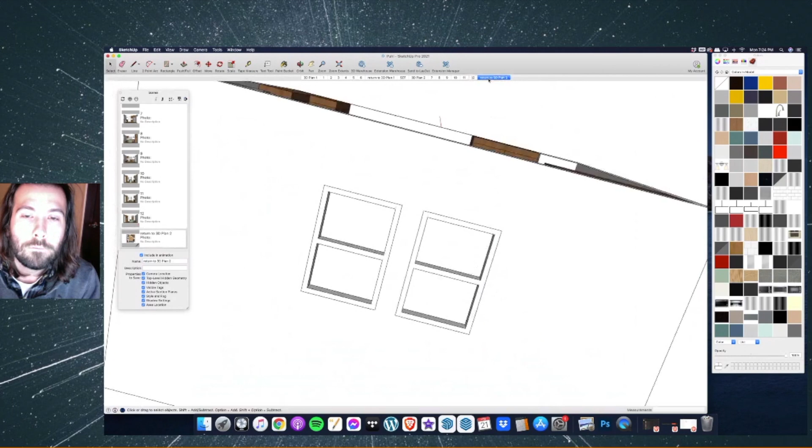So scene number 12, just push that up there. And yeah, there we go. Okay, so we have all of our buttons ready to go.

Now I want to show you guys how to get that crown molding stuff out of the way. So I could import a crown molding that I have. You can also find a simple crown profile on the 3D Warehouse. I'm going to search crown molding. You can find profiles here very easily if you want one.

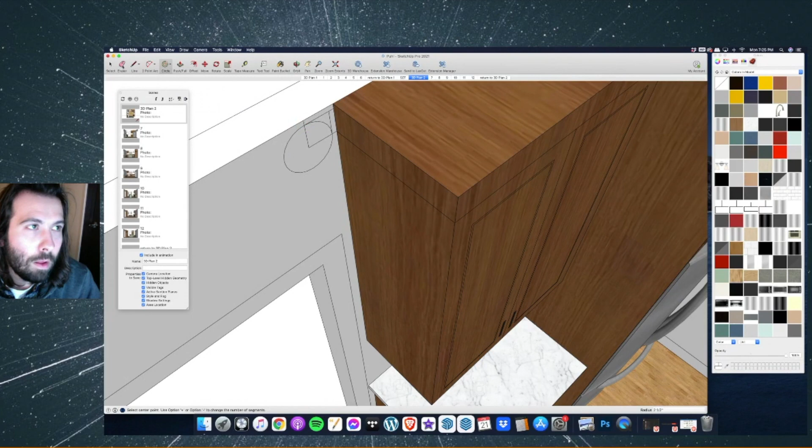Just a quick one, I'm just gonna show you guys how I like to draw one real quick. I'm just gonna draw one 3 inches out, basically drawing a 3-inch square. I'm gonna come down half an inch, come down half an inch, make my little thing there. I'm gonna grab the circle tool and boom. Now let's erase all these extra lines we don't need. And then there we go, that's my crown.

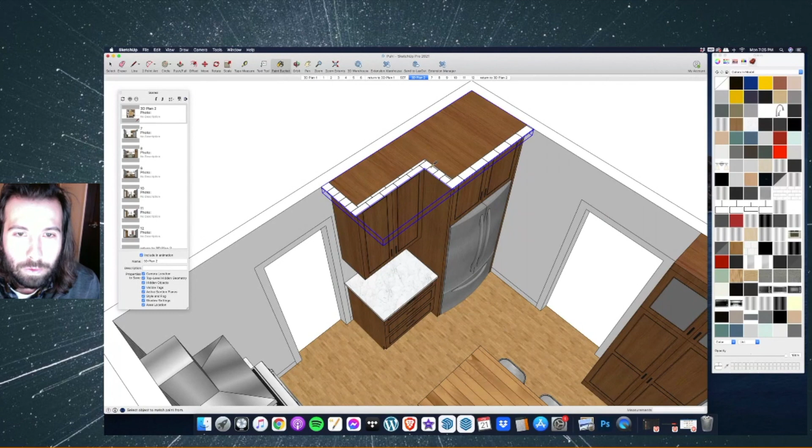Now I'm going to copy that and put one here, and put one over here. I'll come back to those guys. But now in order to use it, I want the crown to wrap around on the top here, so I'm going to grab my pencil tool and just draw the path I want it to go. Then from there, let's hit tools and then follow me. I'm going to highlight my crown, and you see from there it's going to start to follow where I laid down these lines, which is very cool. You just guide your mouse and it's very simple. I can make a separate video on the follow me tool if you guys need some help. It's one of the best tools in SketchUp and one of the trickier ones to learn as a beginner.

So kind of fun, but definitely check out the follow me tool. I'm going to go ahead and pop this one in for the pantry. Let me get it lined up there. Again, I'm just going to trace the outline of where I want the crown to go. Tools, follow me. Sometimes you click on it and it just goes by itself. I'm just clicking back and doing that there. I'm going to make it a group and then we'll just paint it up.

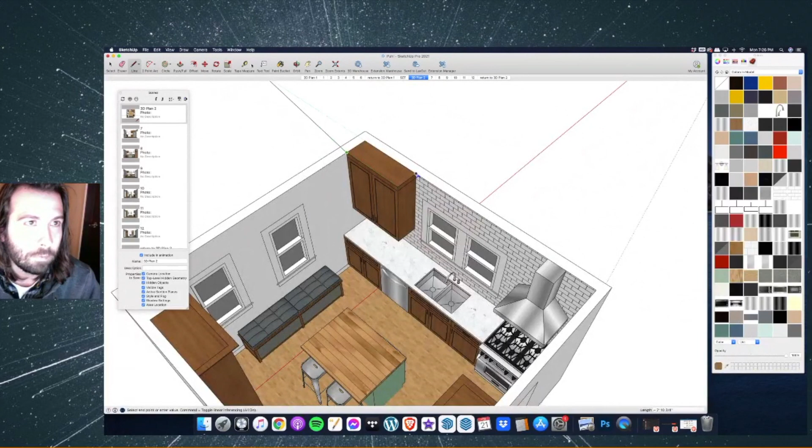And let's move it to the last little guy here. I'm going to just turn it so it's good to go, and get it in its spot. Tools, follow me. And voila.

Cool, and now I think what else is left? Are we almost done here? So we have everything looking good from an aerial bird's eye view. Let me just kind of click through these scenes again.

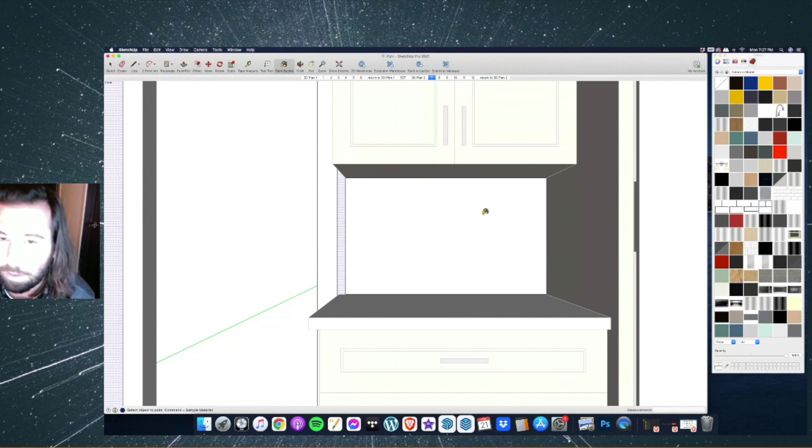We could use some tile back here as a backsplash, so I'm just gonna pop in my square there. Let's just flick that guy back there. Cool, and let's go ahead and hit number 8. So now we're just spinning around the room. Things are looking good here. Let me go ahead and hide that crown.

It looks like I need an overhang here on my countertop. And then, I mean, that's pretty much looking good. Maybe we'll throw some paint on the wall and call it a day. But these are my scenes, the model looks good to go. I'm excited about how it turned out. Let's go ahead and paint the walls here.

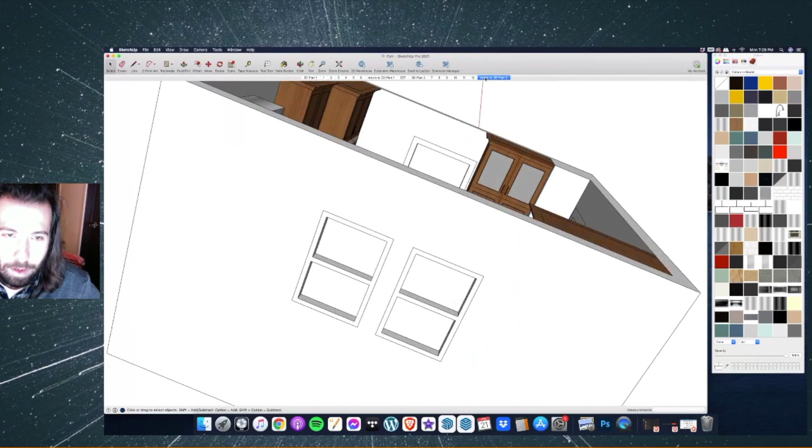So I'm just clicking into the model and I got my walls highlighted there. Again, I have a bunch of paint textures that I already downloaded, so I can just rifle through these. I'm going to select crushed ice just because I know it looks good and it's going to complement the wood palette color there. So I'm just going to paint everything in this nice kind of brushed white look. Get all my walls painted there, and yeah, that's pretty much it.

Now you've got this really cool 3D model you can show people, show clients, show your friends. We could begin to render this if we really wanted to. But that's the video, thank you guys so much for watching.